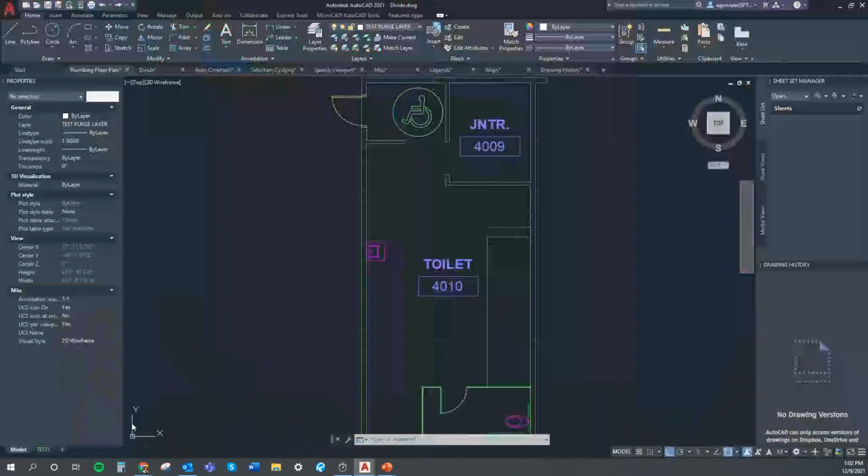So I'm going to share my AutoCAD right now, and I'm going to show you and start a timer in order to accomplish our 30 minutes. So let's go with our first tip.

Our first tip is the quick measure option. This is an awesome tool that is going to help you be more productive. Let's say you are reviewing a plan where you only see the architectural drawing, the dimensions are not shown, but the most important thing is the plan has been drawn to scale very accurately, according to a field survey.

There is very good news: you don't have to click on the dimension tool endless times. All you have to do is go to the Utilities tab, Measure, and select the Quick Measure tool.

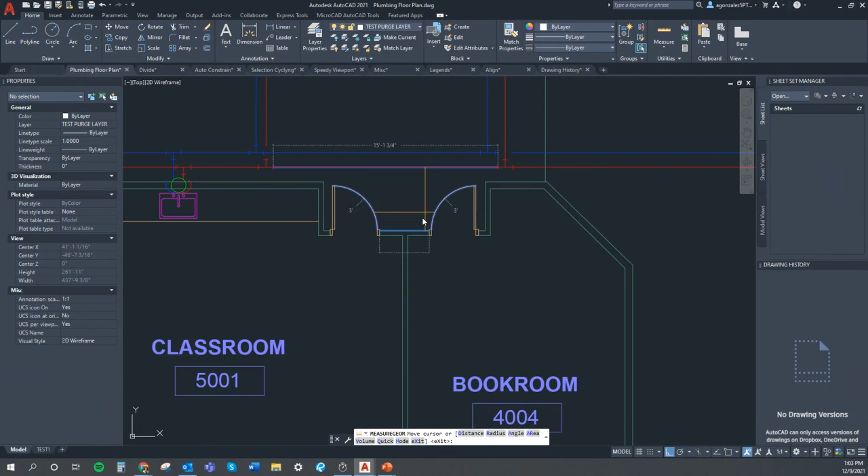Notice as I'm moving my cursor around on the screen, I quickly get measuring information. Here I can check radial dimensions, angles, lengths, and distances between lines. This measures almost all objects except custom objects, hatch patterns, or dimensions. You can do your verifications at light speed, making this tool very powerful, useful, and a time saver.

Our second tip is divide. This command has been in AutoCAD for a long time, but I think it's very important to bring it here because it's a very valuable command. Let's say you want to divide an element into equally spaced segments.

For example, I have this bathroom here, with an area to add all my water closets, and an area to add all my lavatories. So I would like to divide this into equal segments. I'm going to open the draw panel, and here you can locate the divide option.

If I click on here, I'm going to select the object I want to divide. Let's say I'm going to use 5 segments. As you can see, it doesn't physically break it, it puts points as markers. So just to make it visible, we can go to Utilities and Point Style. I'm just going to select one point style I'm able to see, and here it is - here I have my reference points.

So I just copy this and paste the line at the points I have located here.

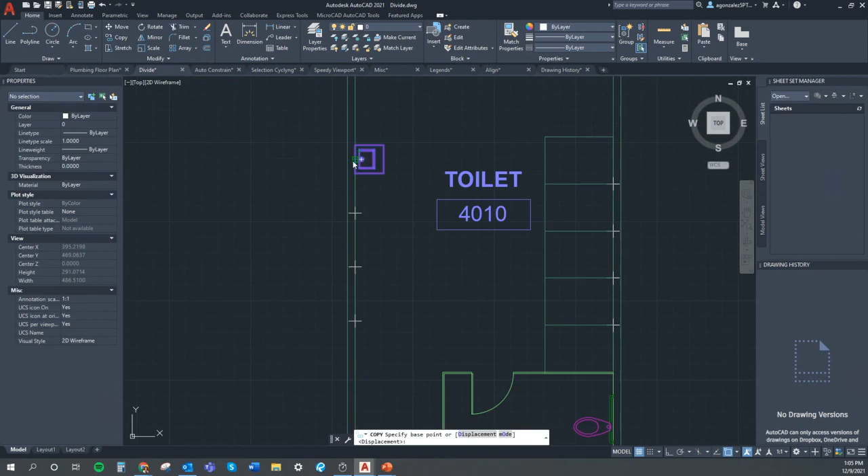Let's do the same thing with the lavatories. I'm going to divide this section into 4, and I will be able to locate my lavatories spaced equally. Once I have this, I can start adding whatever I want, and place my element with the same distance among all of them.

If you don't want to see the points anymore, you just have to go back to the default setting.

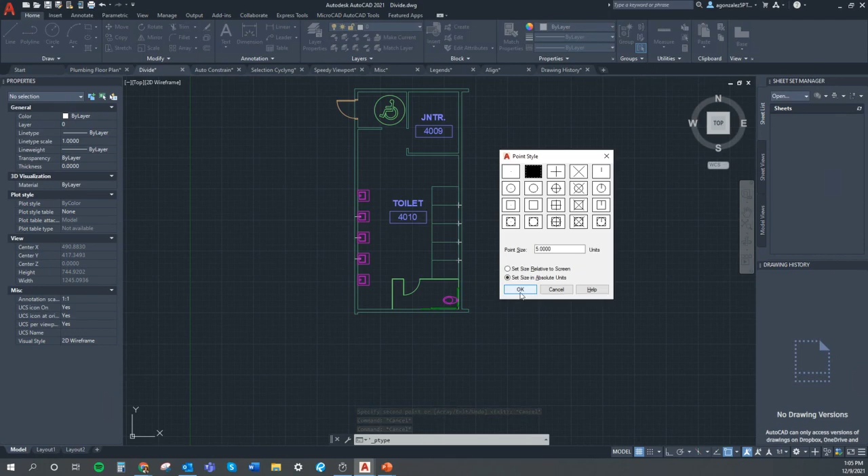I'm going to move to my third tip, which is auto constraint. This is an awesome thing that you're gonna love.

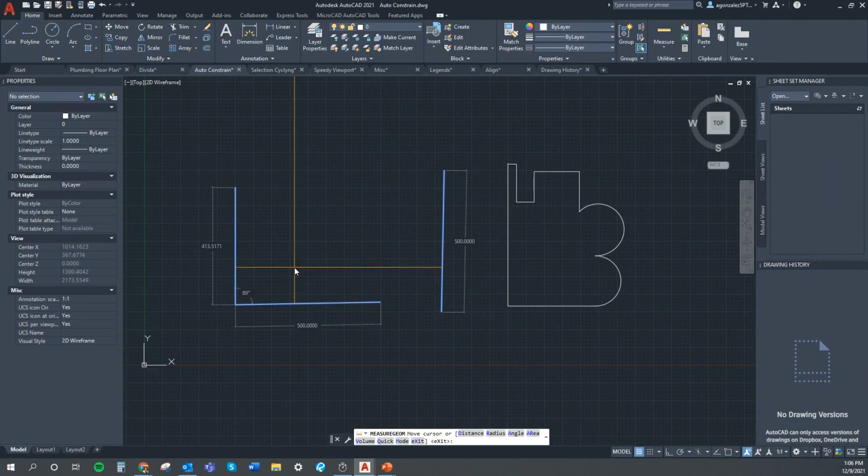If you're a perfectionist and a little bit picky, you'll be annoyed seeing a vertical line that is not exactly vertical, or an intended 90 degree angle that seems almost perpendicular, or a geometry that is not closed, as we have here. If you're reviewing a drawing or doing quality control and have to fix things like this, it will take time.

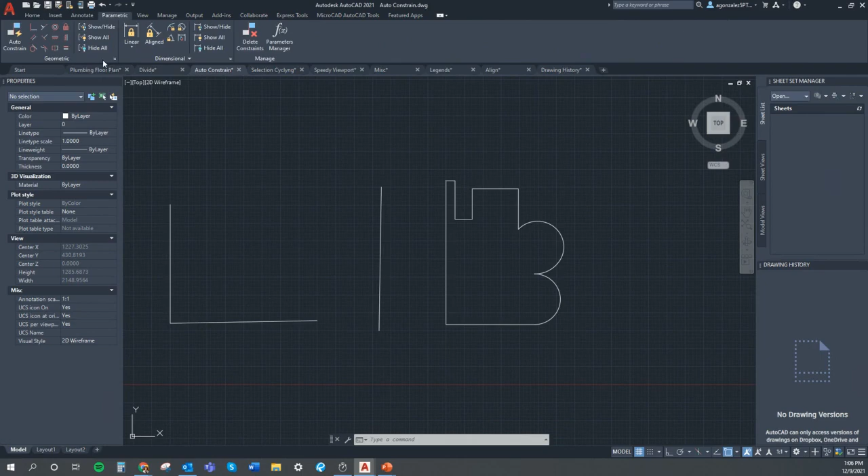So as a reminder of this amazing tool, you can use parametric constraints. Go to the geometric panel, to the Windows settings, and the tab we want is auto constraint. Depending on what you have, you should check or uncheck and apply the options.

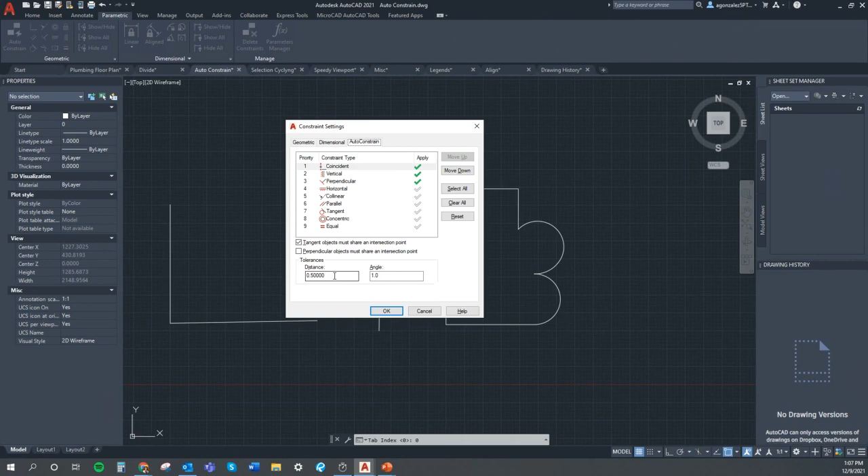In this case I will keep this trim. Then here, the distance has to do with the gap size, depending on the drawing, how big of a gap you allow before AutoCAD won't fix it. In this case, if the distance between two lines is equal or less than 0.5, it will fix it. Same thing with the angle.

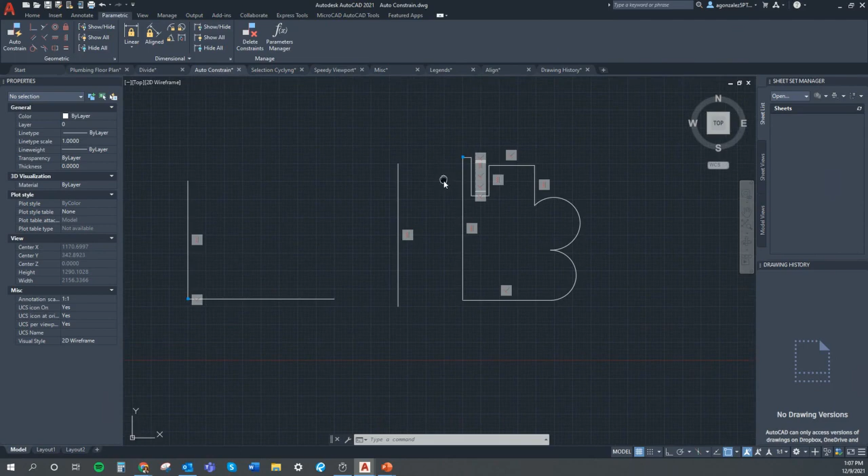Then go to auto constraint, select the objects you want to fix, hit enter, and voila. This line is vertical, the angle here is 90 degrees, and all the gaps have been fixed. After reviewing, in case something has not been fixed, you could also do it one by one.

The next tip, tip number 4, is the selection cycle. This one is a very simple but useful option.

I'm a super fan of clean plans and views so everyone involved can read, work, and understand everything happening in the drawing easily. But unfortunately, that is not always the case. So for those undesirable situations where you're dealing with a very crowded view, we have the selection cycle option.

You can write it down here in the command line, or you can use Control W.

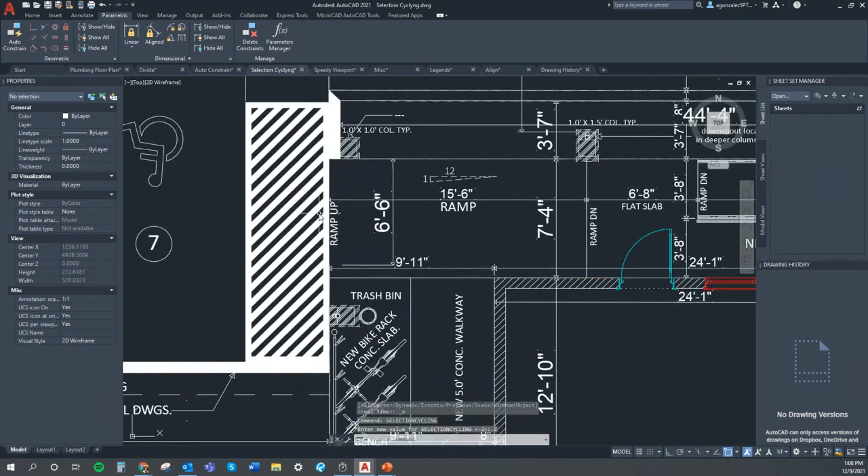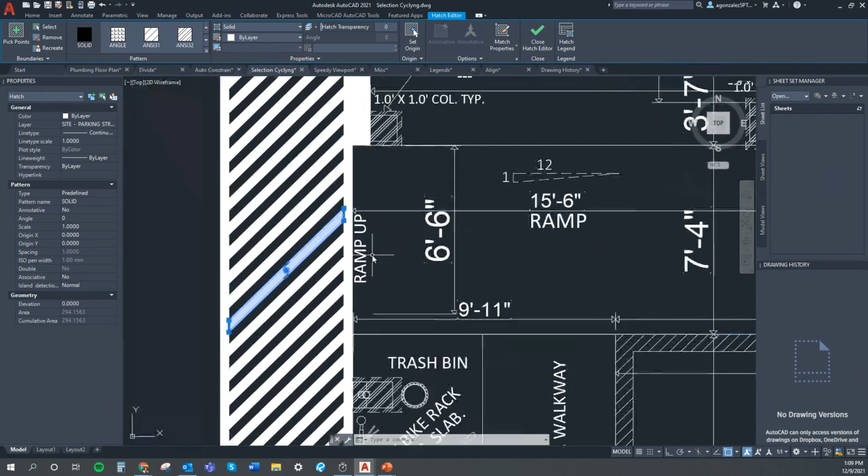Once this is on, you'll be able to see two boxes when you're trying to select. If you click here, a list will appear. As I move my cursor through the list, it highlights the objects, and I can select just what I need in an easier manner. You can also turn it off again with Control W.

Our tip number 5 is the Create Viewport tool. I'm sure you'll love this tool as I do.

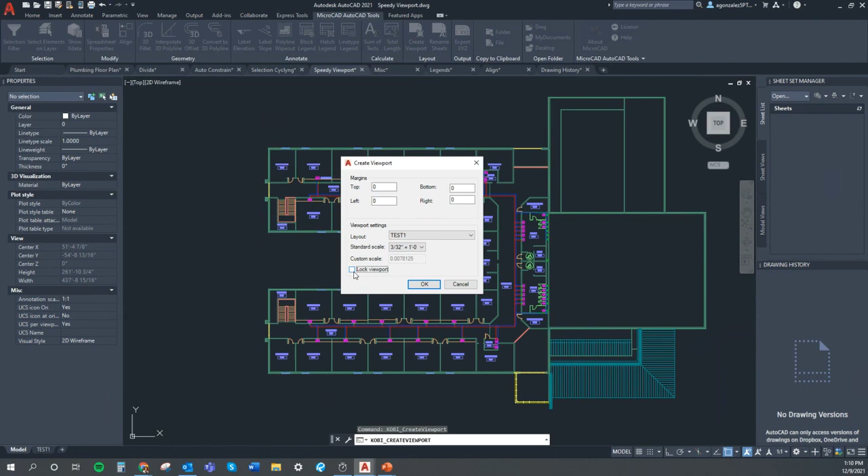I'm going to keep all these settings, click OK, and place the area of the viewport. And here it is. By doing this, you avoid many clicks and steps versus the old-fashioned way to do it.

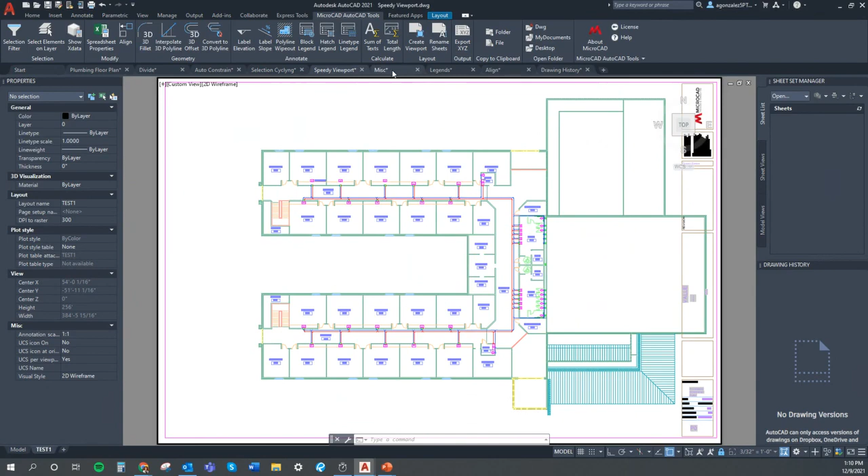Let's move to tip number 6, which is called change.

So if I want to extend all these lines out to one point, align them and make them the same size, most of us would draw a line and do extend. But there's a faster way to do it with no construction lines, using the command change.

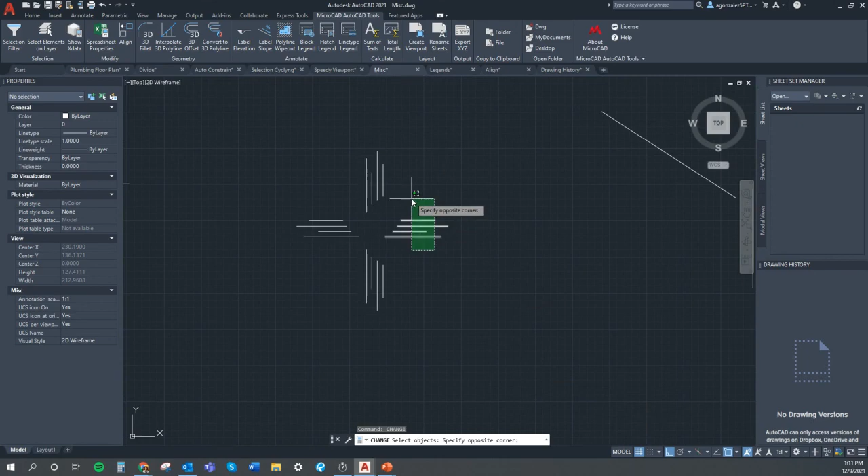I'm going to write down the command in the command line, select my lines, and then the point where I want to align them with no construction lines. As you can see, in just one click, I can do it.

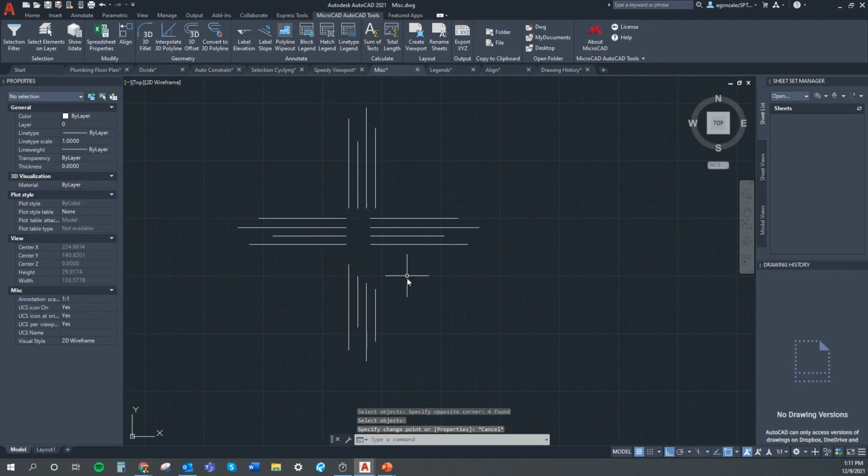This also works with trim. There is a very important tip to use this command: what it does if ortho is on or off is very different. The option I just showed you is with ortho on. Let's see what happens if I have the ortho option off.

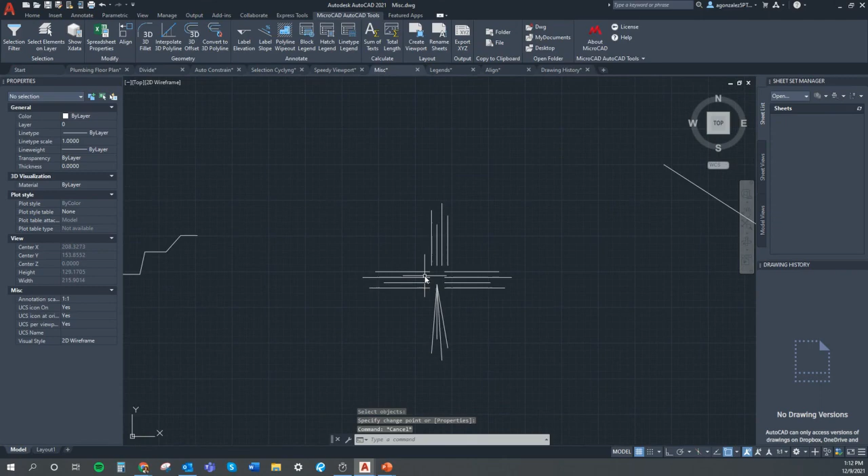I'm going to write the command again, select my object, enter, and specify the point. As you can see with ortho off, what the program does is just merge the lines into one point. So this is very important.

Tip number 7 is the edge mode. So when the cutting edge doesn't exactly cross the objects that need to be trimmed, there is no problem. You just have to set the edge mode to extend. What do I mean? I want to use this line as a cutting edge, but it is not crossing any of those lines. There is an option for edge mode where you could do it without necessarily crossing the objects.

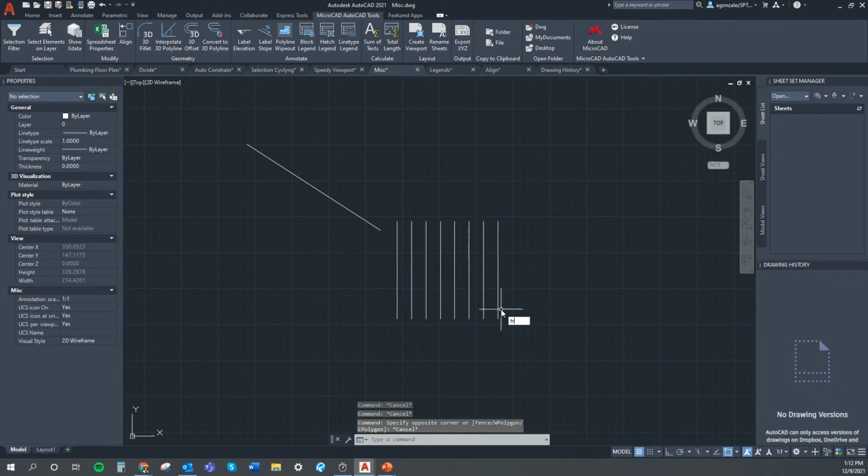So I'm going to start my trim option, select my objects. As I just told you, select the edge mode and then extend. As you can see, this is more than happy to allow me to use that to trim it. This also works with extend.

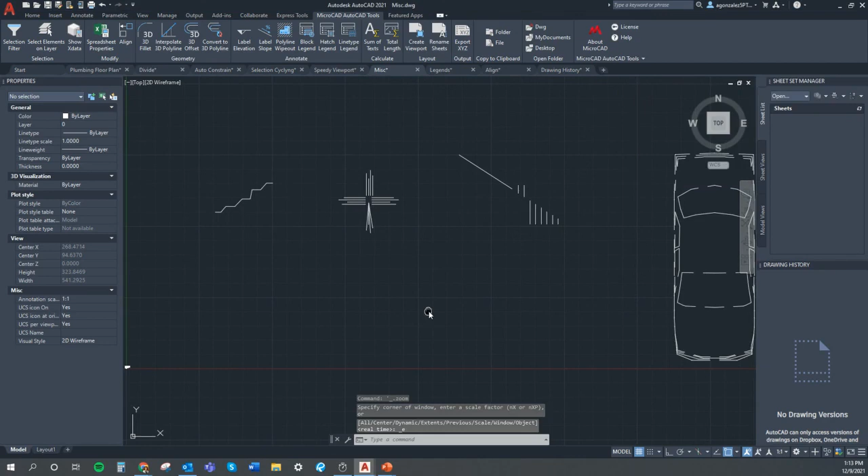So we are going to move to tip number 8, which is create legend. I think this is one of my top favorite tools and is also part of our productivity tools package. How does it work? Based on the objects in your drawing, this will create a list with its respective symbol in one second, versus doing it line by line, text by text, block by block - a big amount of time you can save.

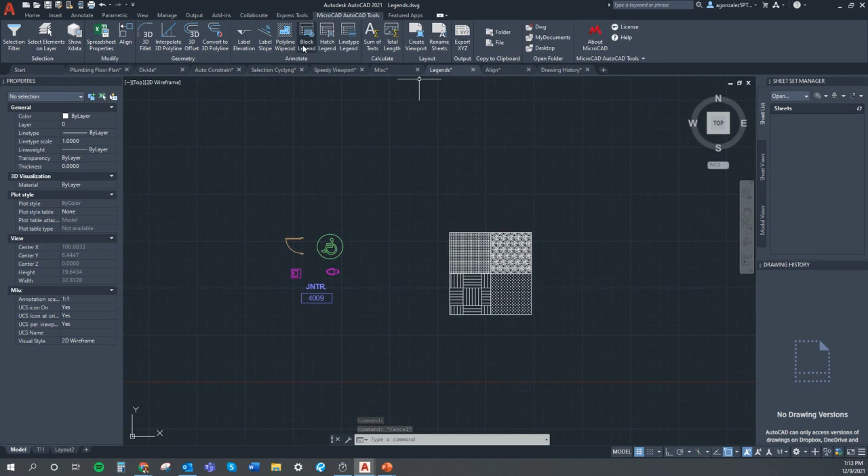I'm going to try here in the Annotate panel of our MicroCAD AutoCAD tools, the block legend. As you can see, a window pops up and you can check or uncheck what you want to see. I'm just going to keep everything. If you have a table style, you can add it here. And you also can change the title.

I'm going to select a point to insert it, and here it is. This populates an awesome legend for me, and it took me just one second. The other cool thing is these are also regular tables - you can edit them if you want, add rows and columns, which makes them very versatile.

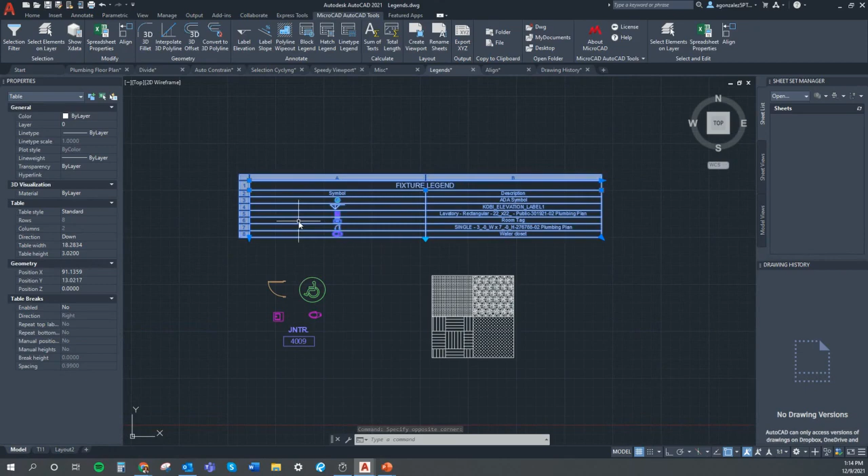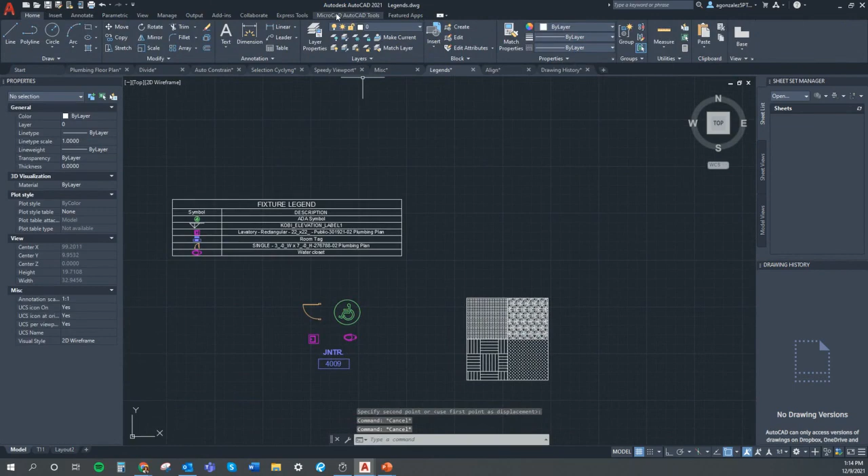So I'm going to fit this. If I want to change the name here, I can do it. And here it is. Let's try the hatch legend, which works pretty much the same. I'm going to click OK. And if we'd like, we can fix the scale of the hatch - this is not going to affect the scale of the hatch you already have drawn.

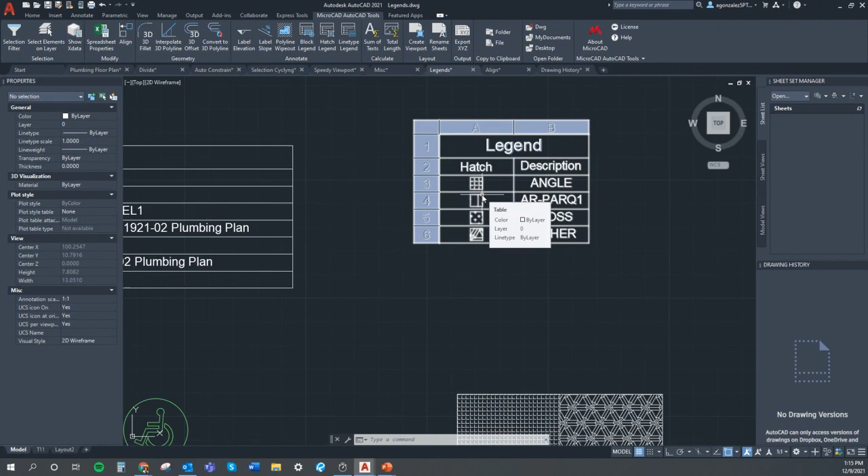Our next tip is tip number 9, and it's the purge command. Talking about fans of clean, neat, and nice AutoCAD drawings as I am, I'd like to show you the purge command. This has existed in AutoCAD for a long time, but I'll show you an awesome update from 2020. This update included the possibility to show you why something can't be purged. The first thing you'll notice is it's so much easier to find than before.

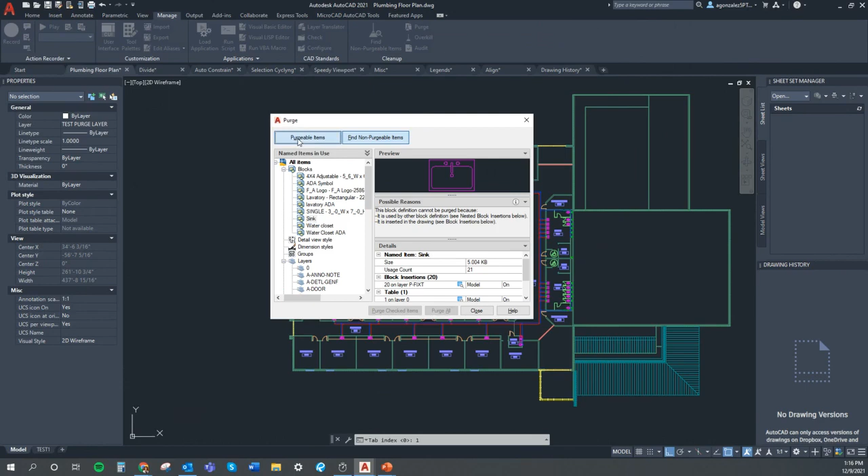It was added to the ribbon in the Manage tab. There is a new panel called Cleanup Panel, with some other cool features. It doesn't matter if you click on Purge or Find Non-Purgeable Items - once the window pops up, you will see great new previews as well. You can look at individual objects and get a visual view of them, which you didn't have before. And there is a pair of individual check marks added too.

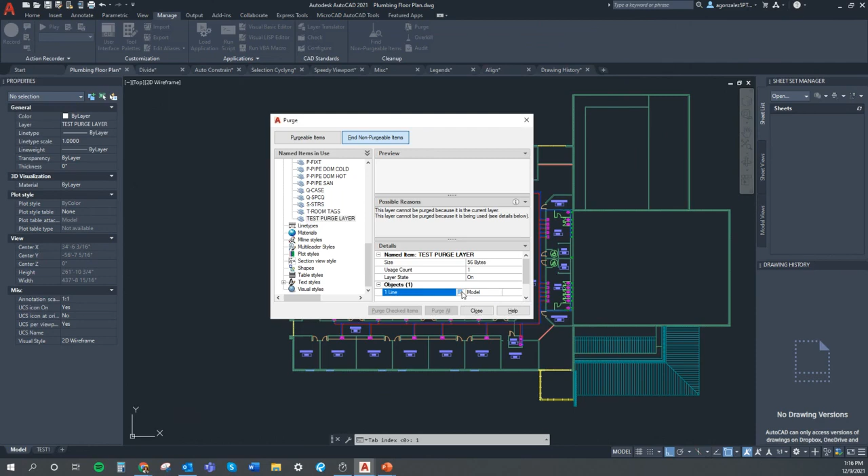I have created a test layer, and you will be able to locate the item. It's not allowing you to delete a layer because there is something in there you haven't been able to locate. If I click here, it closes the Purge dialog box so I can see the troubling item. Once it's located, you will be able to delete it and then delete the layer. This will make your life easier for sure.

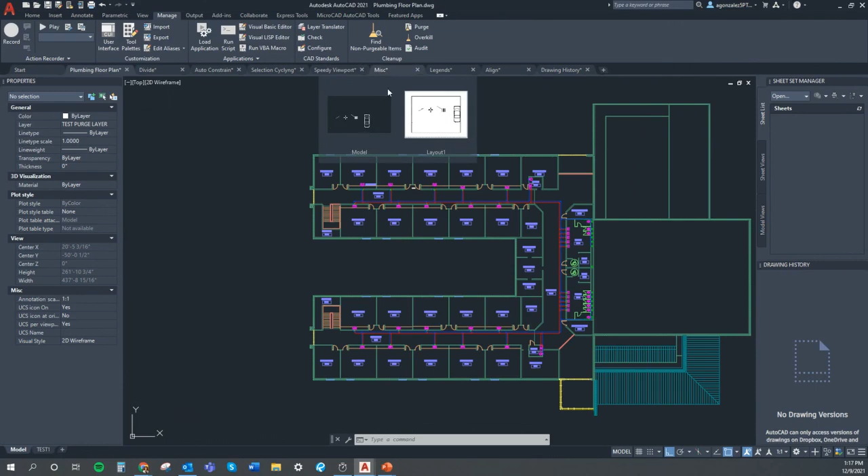Let's move to tip number 10, which is FS for fast selection. For example, here I have many small single lines - too many small lines. Instead of selecting one by one, I can use FS and it selects all the objects touching the selected objects for me with one click. This is a very easy tip, but useful.

Let's move to tip number 11.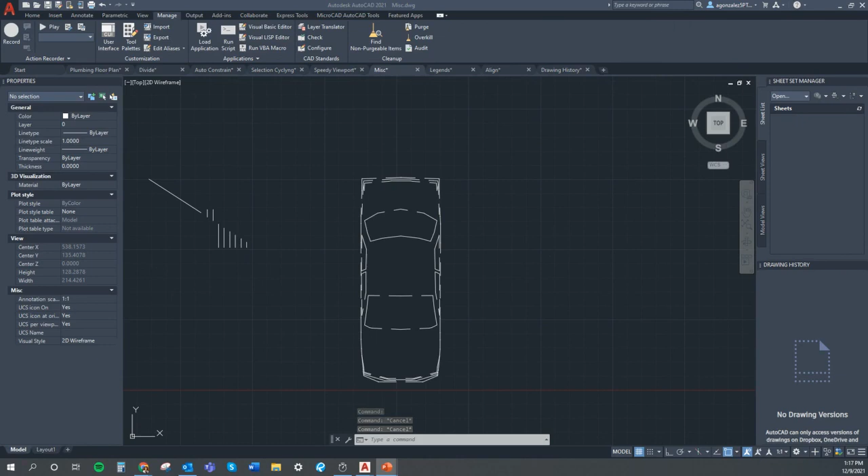This tip is called Align. This is a super awesome improvement included in our MicroCAD AutoCAD Tools. This exists in AutoCAD but is much more friendly because it is very graphical. For example, if you are working in a landscape plan where a lot of objects can have a big variety of angles, this will help you be more accurate, avoid misunderstanding, and save time, which is very important in all projects.

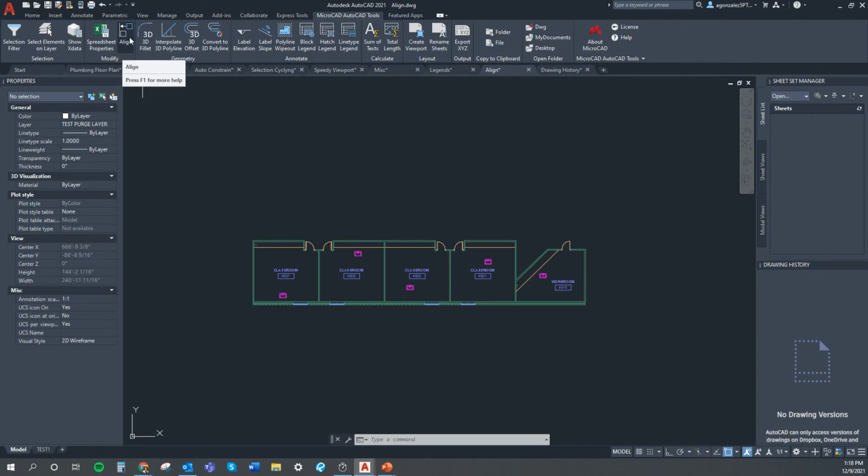This is another awesome option. I will show you how it works. It's located here in the Modify panel. The first thing it asks is to select the objects I want to align. I'm going to hit Enter, and then it asks for my reference point. Here you have all the options you will be able to use, and as you click on each one, you will see what is happening with your drawing.

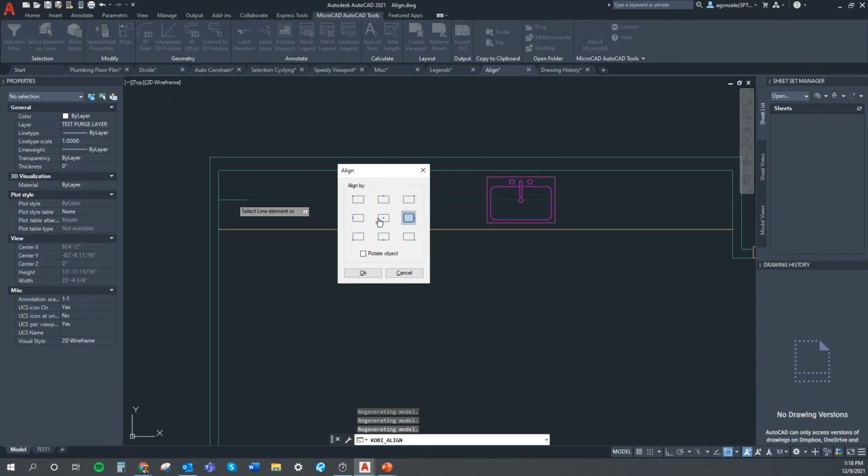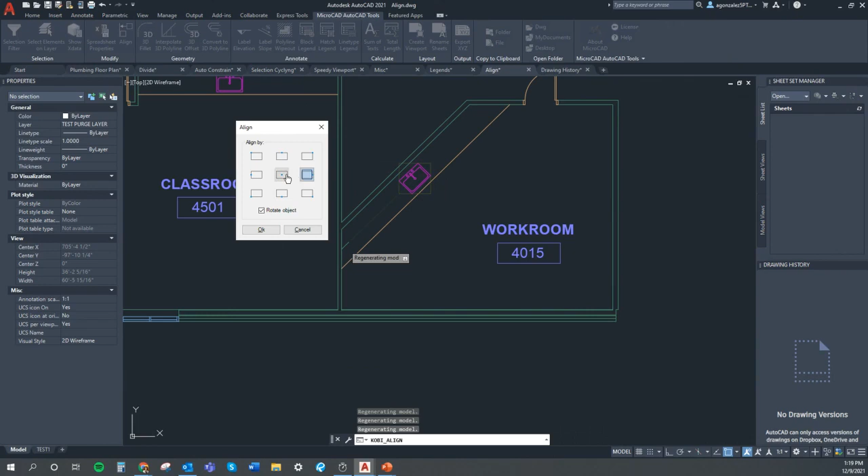Here it is. I will try the rotate option as well so you can see it. I'm going to do the same thing: select my object, my reference line. I would like to rotate it this time, and same thing, you will be able to see what happens with each option. I will keep this one. So this is another awesome option.

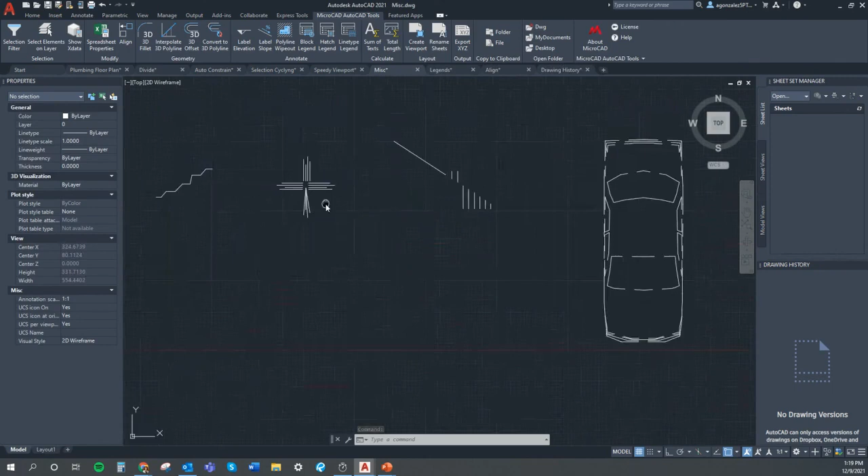The next tip is number 12, and this is one of the Express tools I like more, because it has many of the basic options you can do with your drawings bundled into one.

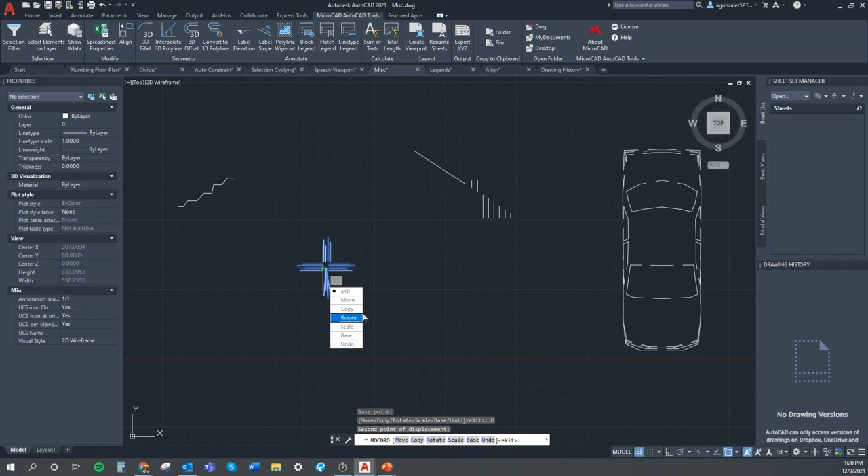This command is called Move Copy Rotate. I'm going to click here, select my object, select a base point, and let's say I want to move. With one click, I want to copy as well. Another click, I want to rotate it. Another click, I want to scale it. Or I want to undo. It has many, many options bundled into one. This is just for less clicks, less time, less money, and more happy clients for sure.

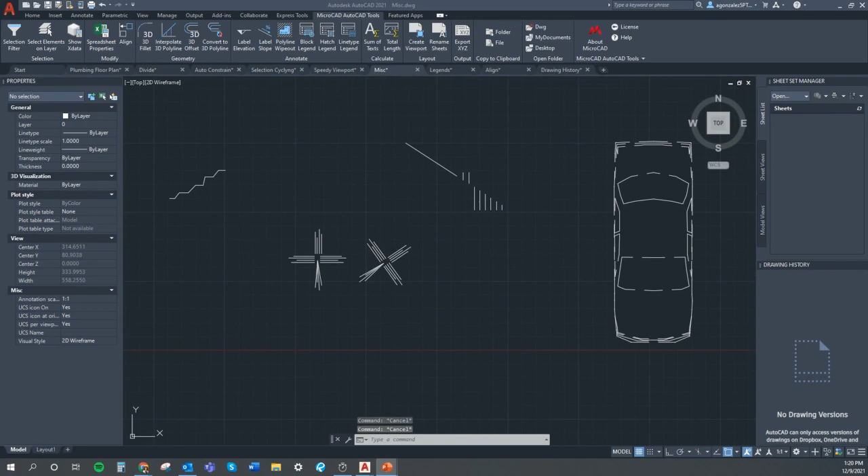Our tip number 13 is the drawing history. With the pandemic, we started using other tools that allow us to work remotely but together with other people, through platforms like OneDrive, Dropbox, or similar. This command works only for files in the cloud and came out in 2021, complementing the DWG Compare that came out in 2019.

Let's say you just had a meeting with a client to get feedback, you started doing updates, and during the review the client said a previous version of the plan is needed. You can pull up the new drawing history palette to see the past version of the drawings. It is located in the view palette. Here you can see the DWG Compare and the DWG History.

This palette, located here, allows you to filter previous versions by who saved it and by when the drawing was saved, and from here you can choose to compare the past version with the current drawing. You also can manage visibility options here according to your needs. This is especially helpful if you have multiple people working on the same drawing.

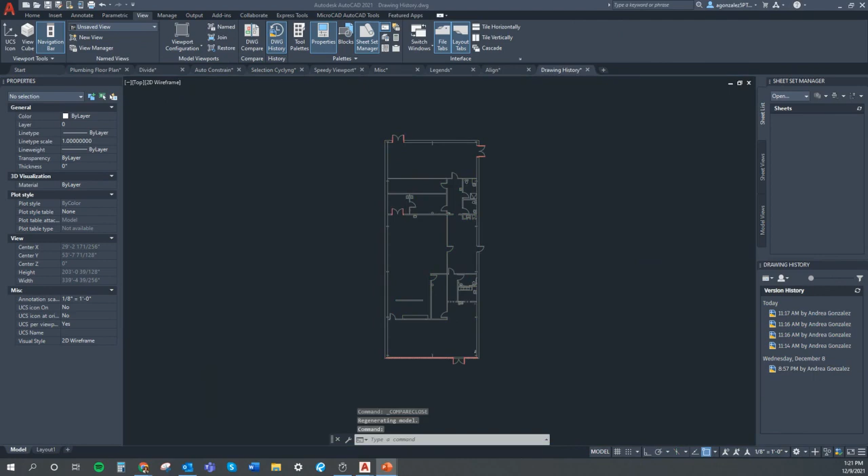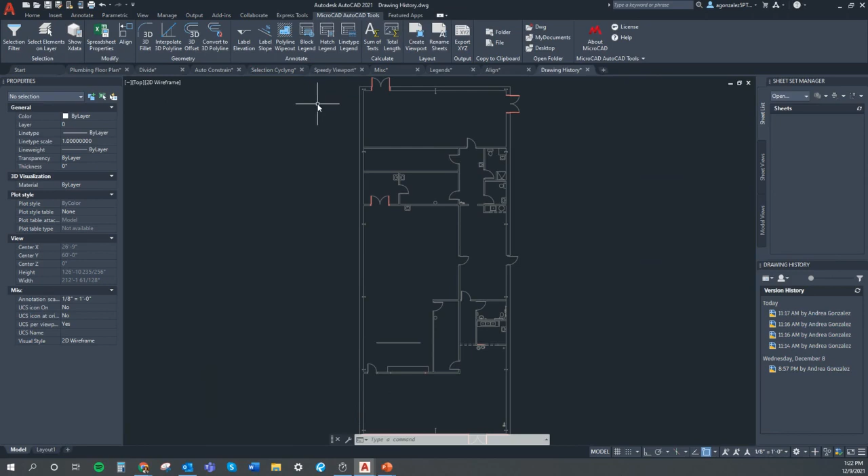Our tip number 14 is label elevation and slopes. These are not in AutoCAD out of the box; they are also options included in our MicroCAD AutoCAD Tools, and are outstanding features of the package. They can be very useful on civil plan drawings, landscape plans, or in a sanitary or storm ground plan, just to give you an idea, or whatever includes elevation or slopes.

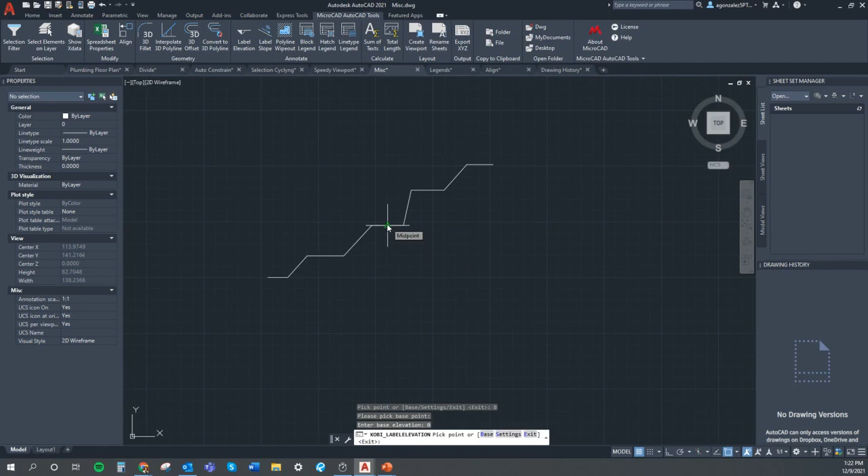So here in the Annotate panel of our MicroCAD AutoCAD Tools, let's try the label elevation. If I click on the option, down here in the command line I'm going to define a base point, and I will give it a number. Anything above this will be positive, and anything below will be negative. Once I've done this, I just hit enter, and then I have all these elevation points set up for me.

Let's try the label slope. This one functions a little bit similarly. I just go ahead and select the different slopes, hit enter, and this time a dialog box pops up. I can specify a couple of different things here, like changing the drawing style from 2D to 3D.

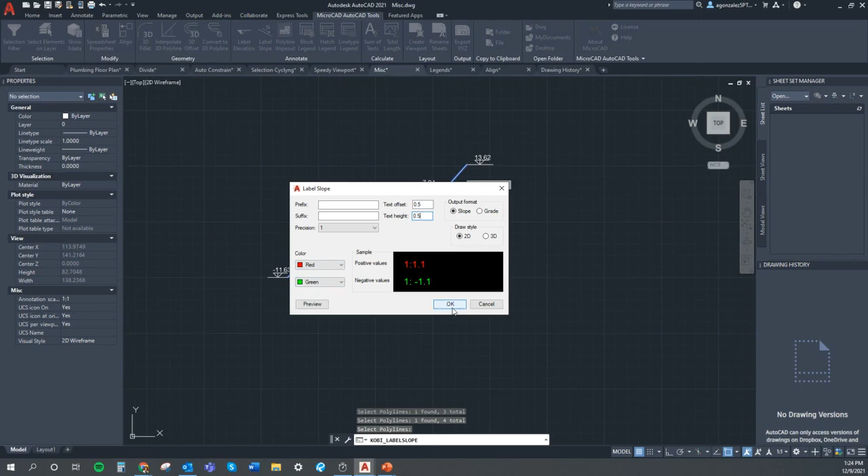I can change my output format to percentage or slope. I will keep the slope. You can add a prefix or suffix if you want. Then we have the text offset, which is the distance from the actual slope line you are specifying, and you can also change the text height. If you have positive and negative values, you can make them different colors. I'm just going to click OK, and then it also creates those slopes for you.

Instead of doing these calculations by hand, this tool will help you not only save time but also be more accurate. This pair of tools are amazing because they do it very graphically and simply, and both are innovative and beneficial for you in terms of time.

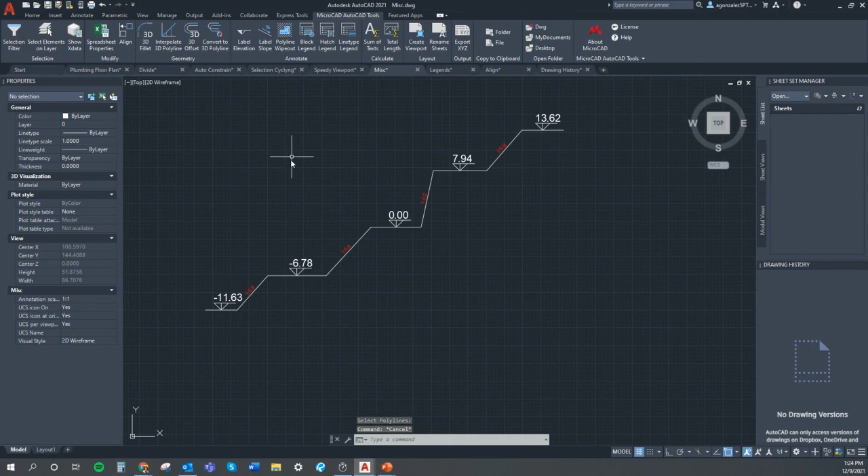And the last one is my tip number 15, and it's just a fun fact to say goodbye. So let's do a text.

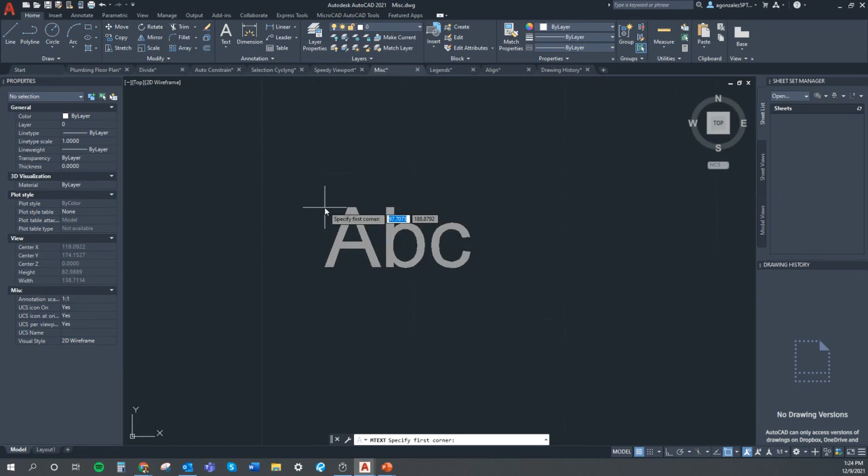As you can see, we have the default ABC name. I'm going to use the command MTJIGSTRING, which controls the sample text for customizing it.

So if I try my text again, here it is. With this, we can close our 15 tips and tricks, and we have 7 minutes remaining to do some questions.

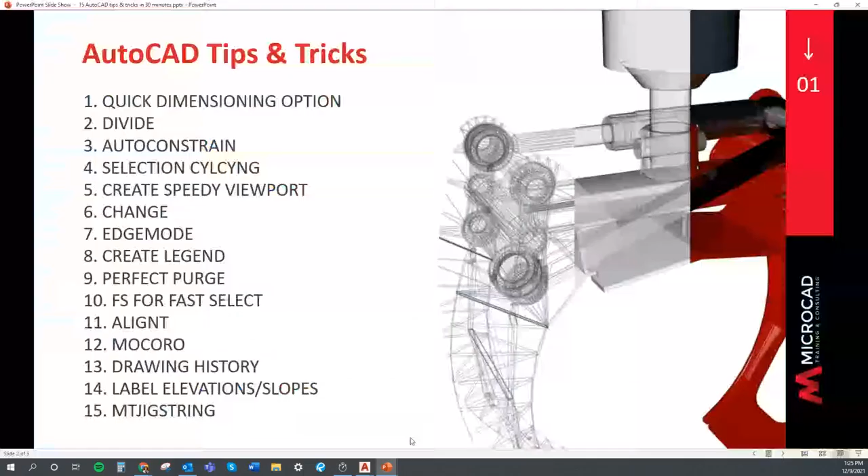Thank you, Andrea, so much for that wonderful presentation. In just a few minutes, I'm sure you're all already going to be leaving here with a lot more information than you came in with. So that's what it's all about. I'm happy that you were able to put this together and share all this with us.

Looks like we do have some questions coming in. I see the first one here: Does this toolkit work in any AutoCAD version? Yes, Carolina, it doesn't matter the version of AutoCAD you have. Once you execute the installer, it will appear on your ribbon.

Great, and again, you can ask any types of questions. It can be AutoCAD related, tool related, or anything that you might be feeling a bit frustrated with. Anything you can ask, feel free to do so. This is your time, and I want you to make the most out of it.

We do have a few more. So next one: will there be any updates to the tools and what will they include? Yes, there will be updates and without any additional cost. The updates will include bug fixes, existing functionality improvements, and brand new tools as well.

And then, is it possible to install the MicroCAD tools together with some other third-party tools? Yes, for sure. Our MicroCAD tools are a regular plugin and can be installed along with any other plugin without affecting or interfering with them.